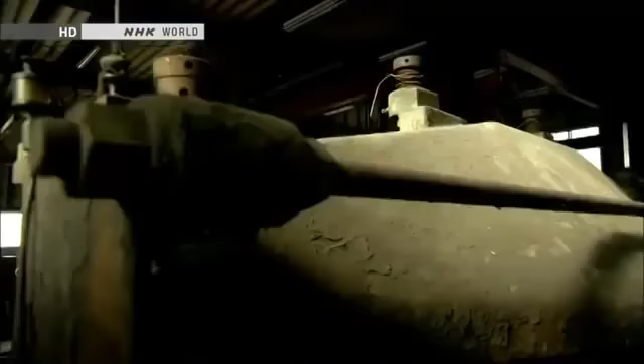The future is just around the corner. In a workshop near Mount Fuji, a curious being has appeared. It's 3.8 meters tall and weighs 4 tons. It is a giant humanoid robot named Kuratas.

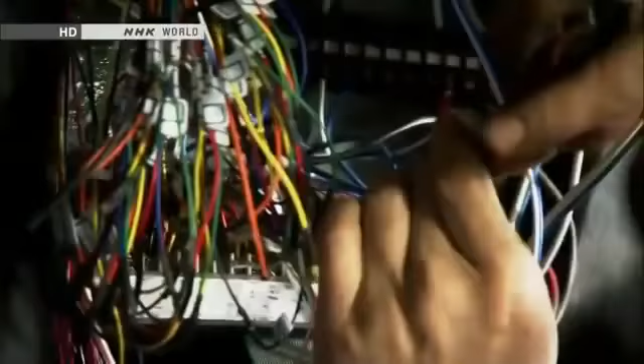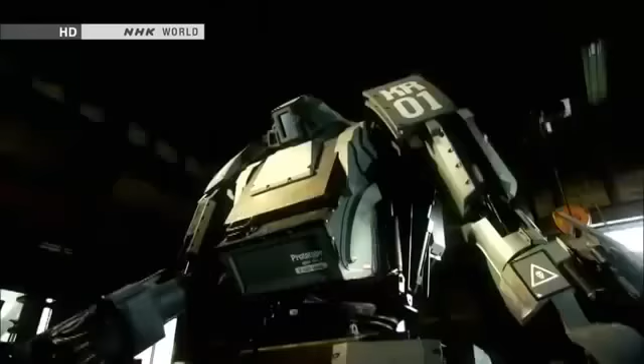Kuratas is a contemporary artist's creation. He holed up here for 2 years, building the robot with input from an expert. He calls Kuratas a work of art, but it's a sophisticated piece of machinery. A person seated inside can control the robot, move its limbs, and grab things. The artist says he was inspired by robots in science fiction tales and animation. That vision sustained him as he worked in solitude.

Things that were once unthinkable are becoming real. How will robots evolve? Well, military applications could be one option. They'll probably become more and more like humans. They could surpass us in strength and ability.

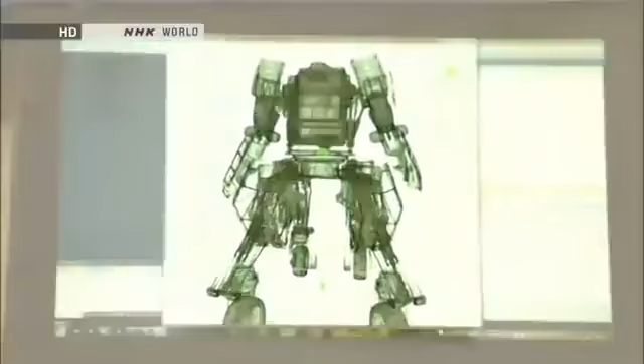People long dreamed of creating these extreme machines. Now, humanoid robots are here. They think like we do, move like we do, and even sacrifice themselves for us.

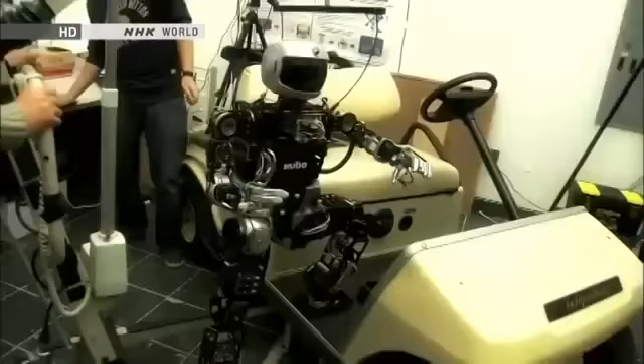We want our robot to change society, because robots must be useful. Electronics and computing, progress in vision systems, there's many pieces of it. We will see much more capability continue to grow.

Since the Industrial Revolution, people have entrusted some jobs to machines. But there may come a day when humanoid robots do much more complex jobs. Then, what will people do? You'll see more and more robots doing things in society, whether it's manufacturing or service applications or home healthcare applications. The key will be to skillfully divide labor between humans and humanoid robots.

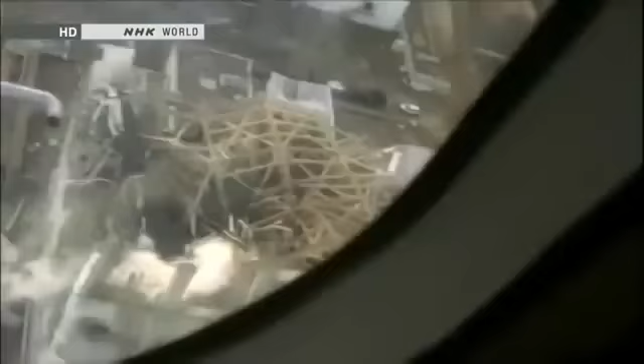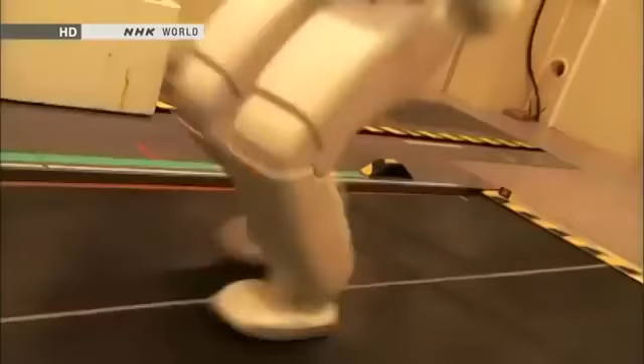The disaster that hit Japan in March 2011 accelerated efforts to develop robots with human traits. The Fukushima nuclear accident left people powerless. Robots can take over when things become dangerous. They can plow through rubble, climb ladders, even make repairs.

People are turning to humanoid robots to handle all of these tasks. We're eager to launch it soon to end the crisis. By joining forces, we can make a truly useful contribution. Only a humanoid could do it. Or the day will come when robots will really assist mankind.

The nuclear disaster in Japan sparked explosive advances in humanoids at the front line of robotics development. This program explores the future that's fast approaching.

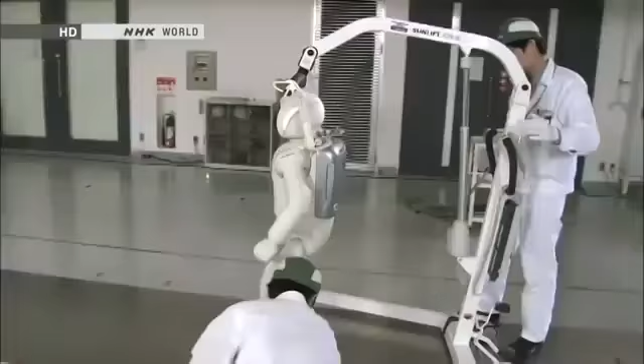Japan is a worldwide leader in the development of humanoid robots. Asimo is the country's crowning achievement. Engineers continue to make improvements.

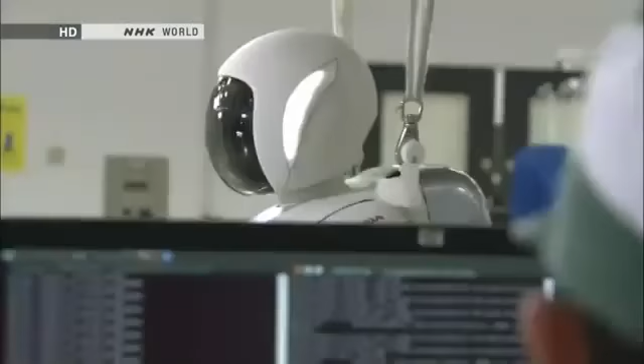Asimo's most innovative feature is its advanced intelligence. The robot can think and act on its own without human intervention. That's made possible by sensors that replicate our 5 senses.

Asimo's head contains 8 microphones. It uses them to listen and engage in conversation.

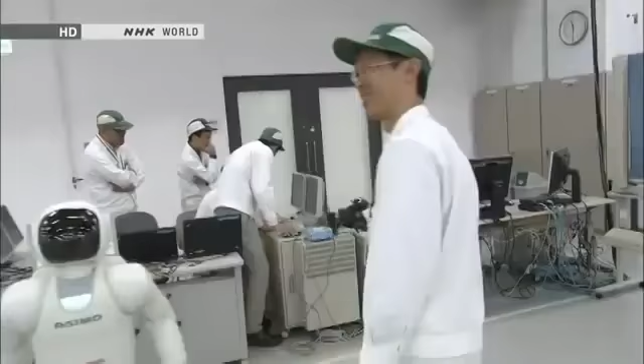2 cameras work as eyes. They can detect humans and use stored data to identify them.

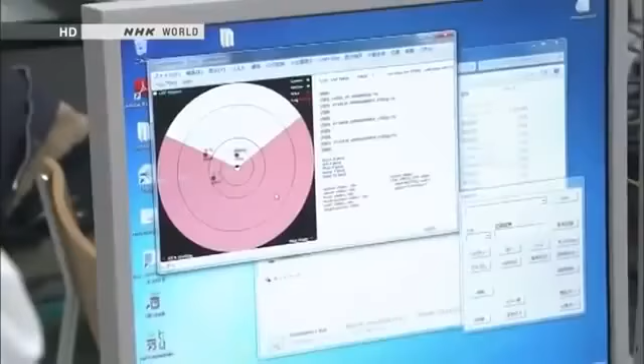Asimo's artificial intelligence analyzes a vast array of information. That's how it understands people's requests and takes appropriate actions.

Asimo also has a sophisticated sense of touch. Its fingers can make subtle movements, like a person's. Sensors are embedded in the fingertips, too. They can gauge the hardness of an object, like human fingers do.

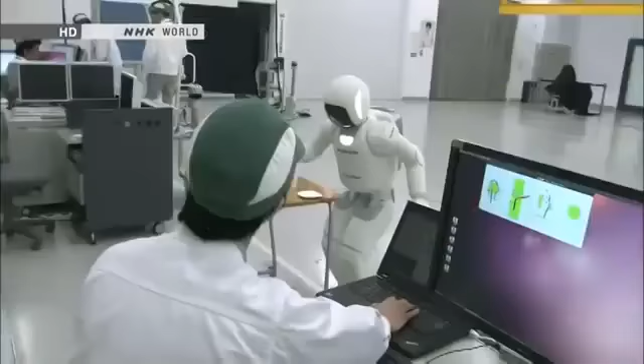Most robots use a fixed amount of strength to grab things. But Asimo exerts more power to open a tightly sealed water bottle and less when holding a paper cup. Its artificial intelligence uses information from the fingertip sensors to adjust the grip.

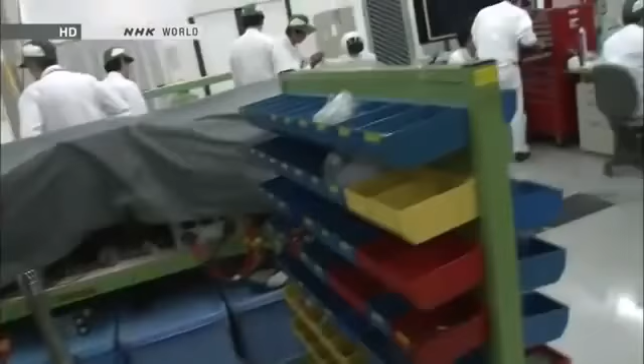The developer's ultimate goal is for Asimo to be a valuable partner that coexists with humans. The engineers who created Asimo all grew up watching animated shows about robots, such as Astro Boy, Doraemon, and Gundam. They dreamed of someday making their own.

Satoshi Shigemi is the development team's leader. He has been designing robots for the past 16 years.

From the beginning, we wanted to design a robot that could help people. To realize that dream, we're constantly asking ourselves, what kind of robot would be able to change society, make people happy, and make life easier for people around the world? Our idea is to create a robot that will change how people live. We're working through the technological issues, one by one, in order to reach that goal.

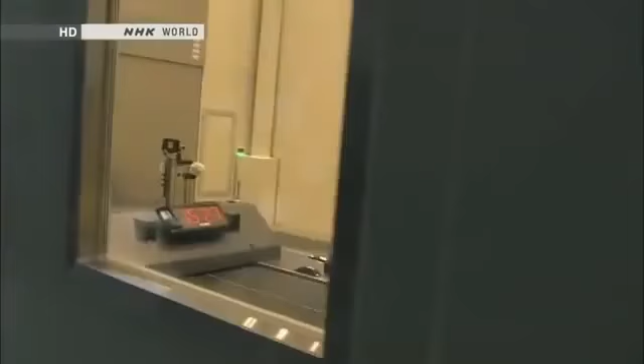Asimo's advanced physical capabilities are revolutionary. The robot can walk and run. It can reach speeds of up to 9 kilometers an hour.

For robots, walking is much easier than running. When running, both feet momentarily leave the ground. Balancing in mid-air is no easy task.

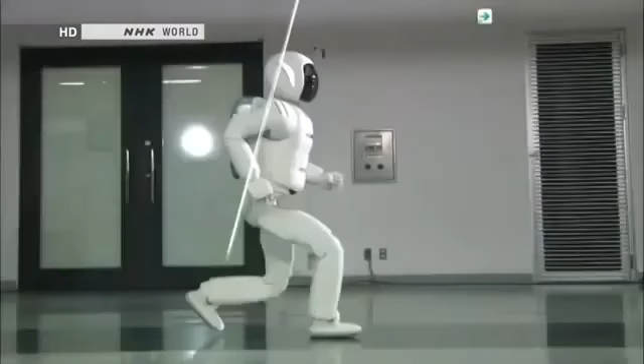Maintaining posture while jumping or floating in the air was a major technological breakthrough. Asimo leans its upper body slightly forward to maintain overall balance, going forward straight in the air. Sensors in Asimo's waist measure the robot's angle, and it leans slightly to compensate, forward or back, side to side. That's how it stays perfectly balanced in the air.

Asimo has been evolving ever since development began in 1986, much like a growing child. But something happened that made researchers realize Asimo's real-world limitations.

It was the accident at Tokyo Electric Power Company's Fukushima Daiichi nuclear plant. The damaged reactors released radioactive substances, making it difficult for humans to deal with the crisis. People needed something that could confront the dangers and bring the plant under control.

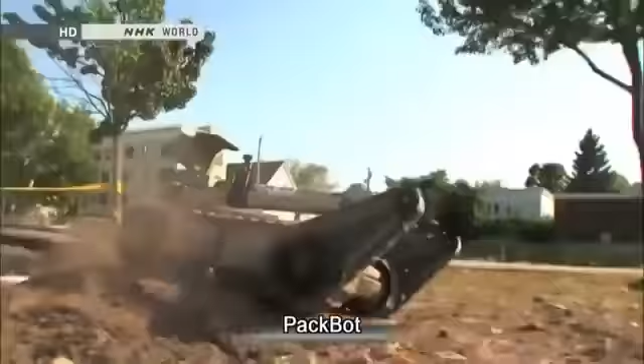Robots. Japanese officials sent a request for robots developed by the U.S. military. The robots were sent to Fukushima in April 2011. They recorded images inside the damaged reactors.

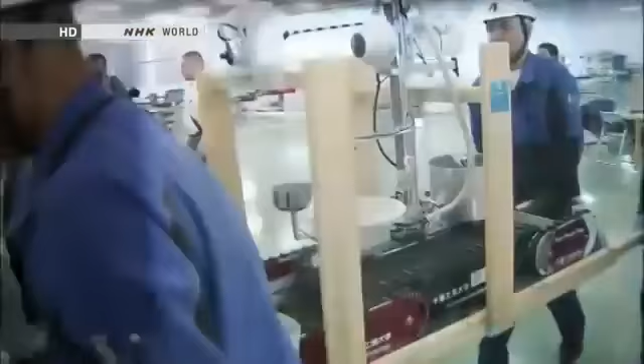Since then, a variety of Japanese robots have been enlisted as well. Robots have proven to be useful, but 2 years after the accident, they're only used for inspections. They're not able to do all the work of humans.

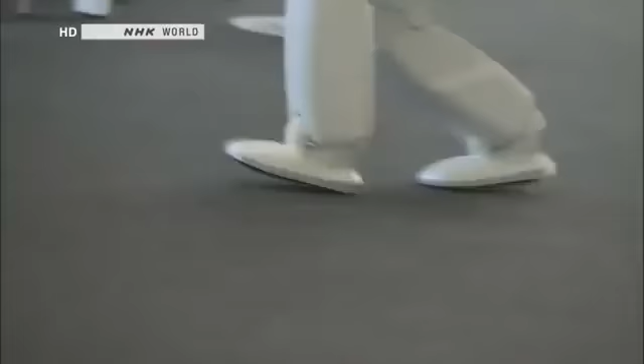What about Asimo? Right after the disaster, people flooded Honda with phone calls and emails asking the company to send Asimo to the Fukushima plant. But Asimo wasn't up to the task. It could move nimbly over an office floor and other flat surfaces, but large vertical gaps and obstacles were a different story.

We heard from many customers. We ourselves regretted that Asimo couldn't be of help. It was obvious that Asimo we had built wasn't ready for real-life action. We realized right away that we needed to make something different, something new that could offer immediate assistance.

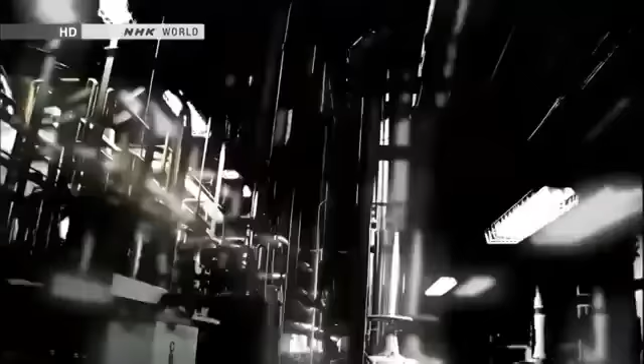Honda wasted no time. Company officials offered to create a robot free of charge to assist TEPCO in the recovery. TEPCO accepted. Officials asked for a robot that could open or close valves inside the nuclear plant. We wanted to flush out radioactive materials that remained inside the pipes and bring down radiation levels in the facility. That was our first goal. Unless we opened or closed the valves, the area would remain highly radioactive, and that would prevent workers from entering the facility and impact the entire decommissioning schedule.

How many valves are there? Each unit has from several thousand to tens of thousands of them.

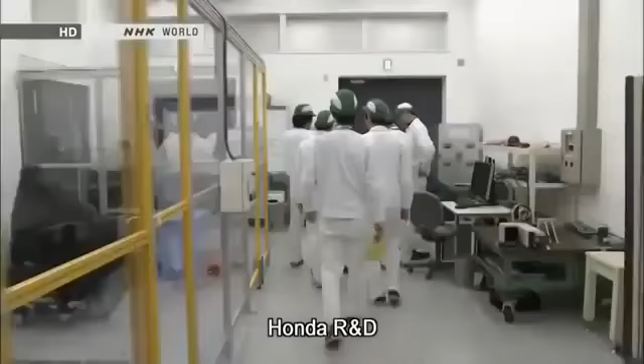In July 2011, 4 months after the accident, Honda began designing a robot for use at the nuclear plant. Members of the Asimo team were put in charge of the project. A humanoid robot would take too long to build, so engineers focused on making a robot specifically for operating valves.

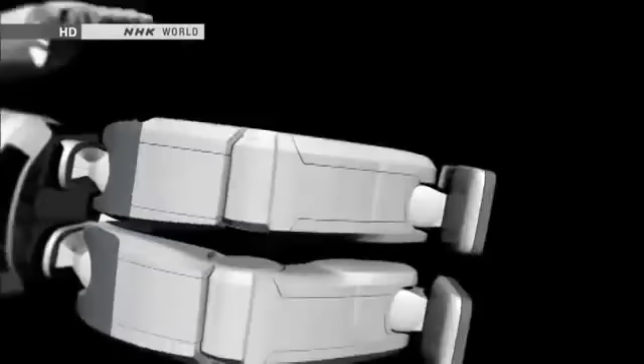Asimo was crucial to their efforts. Its ankles employ advanced balancing technology. Developers reasoned that using it would allow the new robot to work inside rubble-filled reactor buildings.

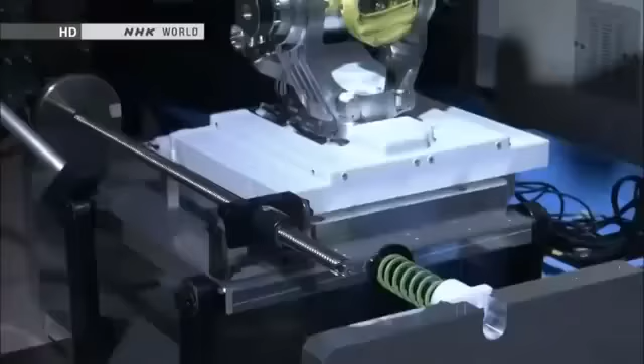The team worked exceptionally fast, completing a prototype in just 4 months. They turned Asimo's leg into an arm for operating the valves. Even when the base moves, the arm remains steady. So far, so good.

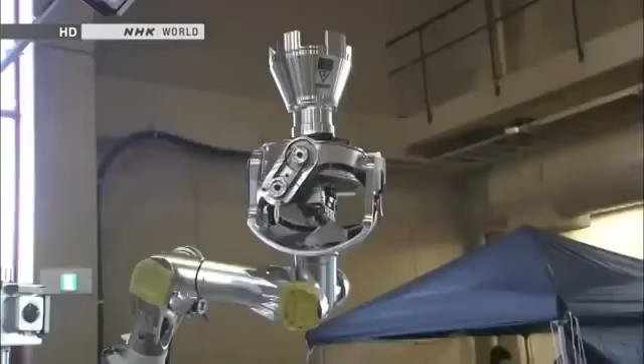Officials from TEPCO evaluated the prototype at the National Institute of Advanced Industrial Science and Technology. The government-backed group for cutting-edge research contributed to the development effort. A TEPCO official couldn't take his eyes off the robot's movements.

We may be quite demanding. That's okay. We might be quite direct. The test is designed to replicate conditions inside the nuclear plant.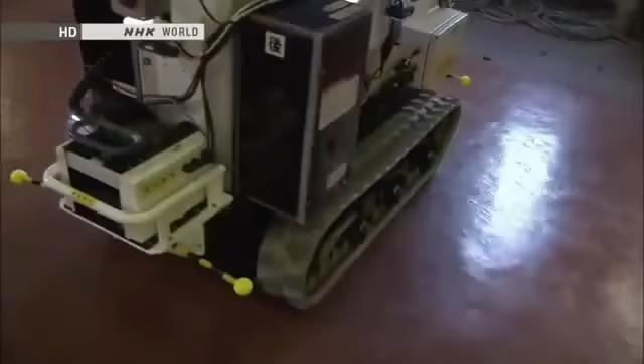The robotic arm is remote controlled. Testers send the arm toward one of the valves. There are a number of unknowns, including the condition of the valves. They may have rusted since the accident. A valve might break if the robot applies too much force, or it might not budge at all.

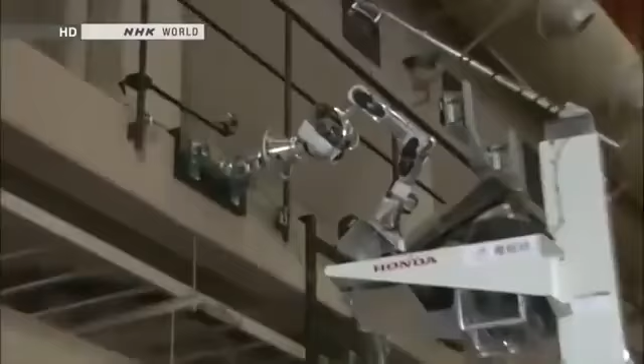The robot uses just the right amount of force and turns the valve on the first try. It's passed the test. This robot can do more than inspections. It could help in the recovery effort.

From what we've seen, the robot seems near perfect. We want to use it as soon as the need arises. It's important that we quickly do what we can to make that possible.

The Fukushima accident also encouraged U.S. developers to design emergency response robots. Department of Defense officials have spearheaded the effort. Before, they had shown little interest in humanoid robots. Now, they view them as vital for disaster response. The architect of the new strategy is Gill Pratt of DARPA. He oversees funding for leading-edge research at the Department of Defense.

There are many aspects of disaster response in Fukushima that inspire people in robotics to work on new capabilities. If they were able to take action during those first 24 hours, the first reactor maybe would not have blown up, in an environment too dangerous for a person to work in.

What's important to us is that the robot is compatible with human environments, compatible with human tools, and also compatible with human operators without special training. As a result, the easiest form that comes to mind is the human form.

DARPA is backing the development of a humanoid robot for catastrophes, such as nuclear power plant accidents. This company is leading the development work, having already built several military robots. Okay, I'll show you the current status of the robot.

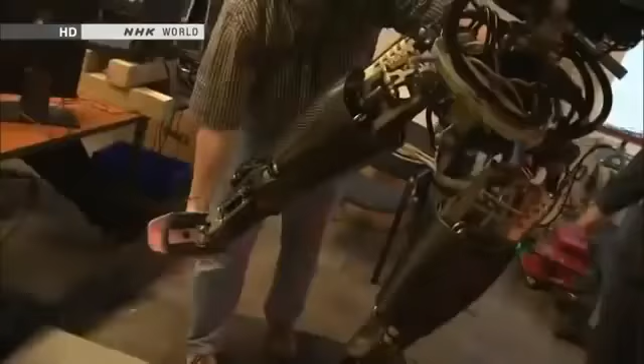This is the first American-made humanoid robot for disaster response. It's called Atlas. Before, U.S. designers had focused on robots with specialized functions. Why the sudden interest in humanoid robots?

Traveling over debris, prying open valves, using tools for repairs - performing multiple tasks like these is impossible for specialized robots. Crises also require robots that can navigate doors and stairs. Humanoid robots are ideally suited for such situations.

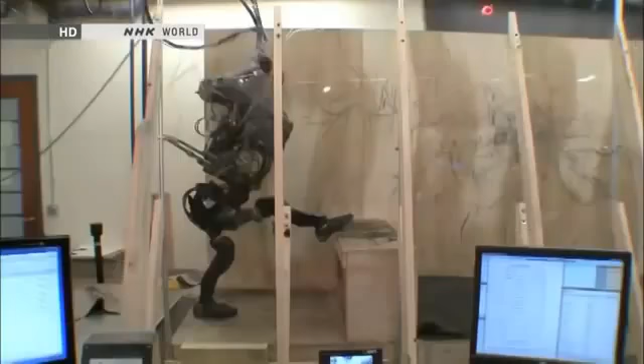Tests of this prototype were going smoothly. It can easily climb stairs and jump from a height of nearly 1 meter, and can negotiate obstacles using its arms and legs. It can already handle more demanding environments than Asimo can.

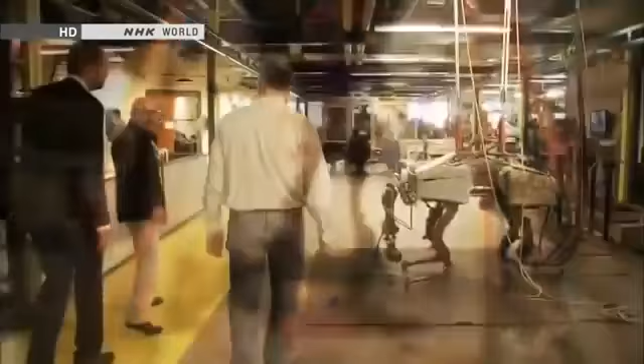Atlas is loaded with technologies originally designed for military robots. A quadruped robot called Cheetah can race through a battlefield at 50 kilometers an hour. LS-3 is for transport - it can carry heavy supplies for soldiers.

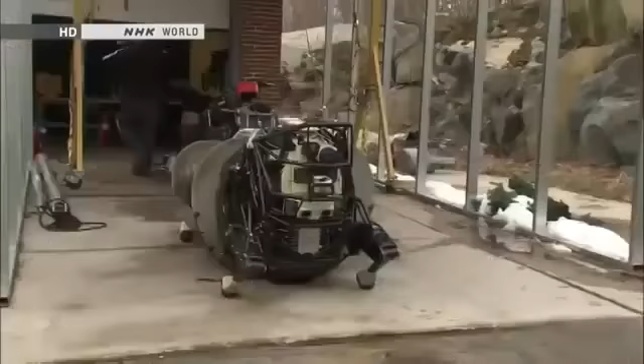The ferocious-looking robot gets its strength from a powerful hydraulic drive system. A hydraulic device can be small, yet quite strong. The black cables convey hydraulic power to the legs, generating the brute force required for harsh battlefield conditions.

A web of hydraulic cables covers Atlas's body, forming a muscular suit of armor for clearing debris.

Another important technology comes from military robot engineering. This machine's joints have a wide range of motion, allowing for flexibility that humans can't achieve. Atlas's joints are capable of moving in 28 different ways, so it can crawl through narrow spaces and withstand sudden shocks.

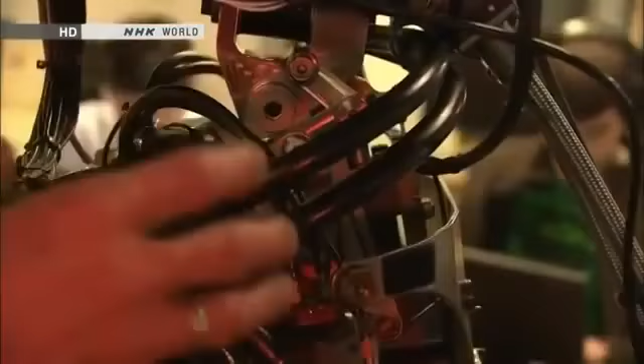But then we have the knee - this has 3 in the hip, just like us, moving this way, and then this way. I am very impressed with the number of degrees of freedom - it will be able to do these human-compatible tasks without a lot of the limitations that other robots have.

Engineers will combine Atlas's rugged body with sophisticated artificial intelligence that's almost near completion. They aim to complete the robot by December of next year.

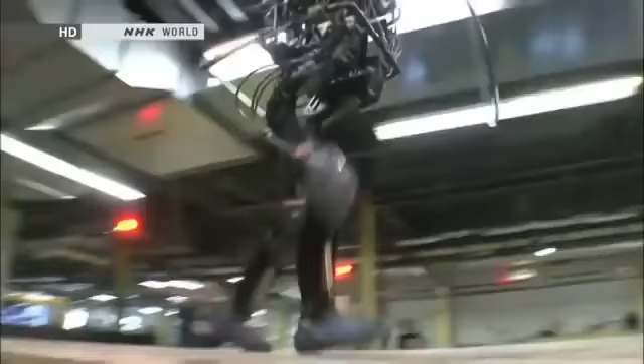One reason you see humanoid robots is because there are some people working who are really interested in robots as an entertainment thing or as a performance thing. I think that's different - we're much more interested in basic capabilities for emergency response and rescue. So I don't think Asimo has been designed to do those things yet.

U.S. engineers stepped up their efforts to develop humanoid robots after the nuclear accident in Japan. Japanese researchers are embracing the same mission.

In November 2012, robot engineers from around the world gathered in Osaka for an international conference on humanoids. Gill Pratt from DARPA was one of the participants.

He came to invite engineers to join a project sponsored by the U.S. Defense Department. On March 11th, after 24 hours, if only a robot had been there to go and open that valve, the entire disaster could have been averted. But we didn't have one, and furthermore, we didn't have anyone that could do the job. So shortly afterwards, we actually started planning the DARPA Robotics Challenge.

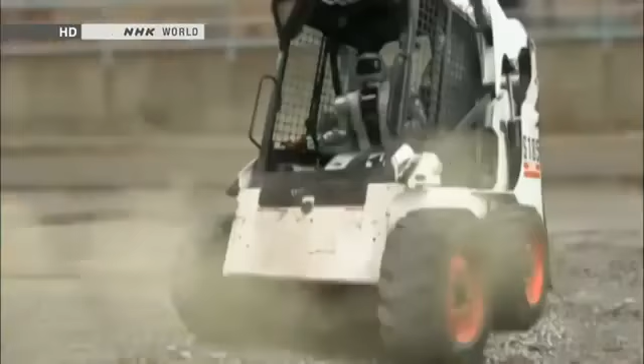The challenge consists of 8 tasks: driving a vehicle to approach a disaster site, walking over rubble, removing obstacles, opening doors, using tools to break down walls, climbing ladders, turning valves, and making repairs.

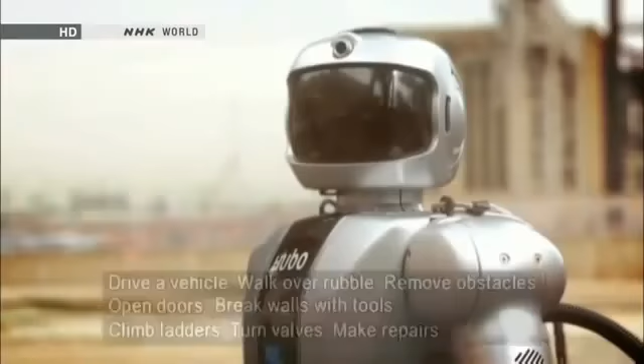A single robot must complete all 8 tasks. The development period is 2 years. DARPA will provide contestants with funding of up to $4 million.

DARPA has received over 100 proposals from research groups worldwide, including renowned organizations like NASA and MIT. Japan is at the forefront of humanoid robotics engineering, yet its researchers hesitated to throw their hats into the ring.

So actually, to me, it's difficult not to see that some of the results of the DRC are going to be used to advance, as you say, advanced military technology. The DRC is about developing robots that I believe wholeheartedly are completely impractical for offensive military purposes.

Will the technology that we come up with find its way into military systems? Probably yes. But I guarantee you that if you work on a robot for healthcare, there's a chance that that technology will also find its way into military systems.

The members of one Japanese research institution wanted to take part in the competition.

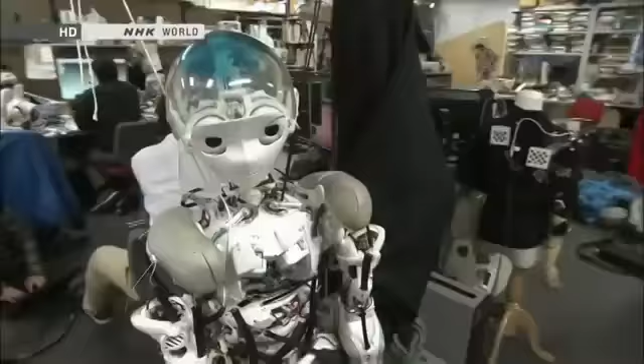They worked at the University of Tokyo's robotics lab. Researchers there, along with those at Honda, are global leaders in robotics engineering. But they faced a major obstacle to competing: the university bans military-funded research.

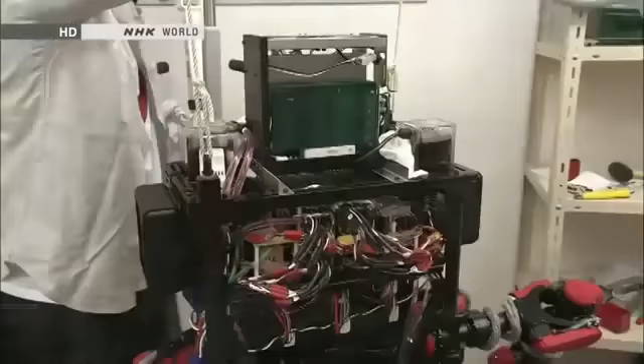Three researchers made a decision. They told the university they were leaving. Then they decided to set up a venture company and enter the DARPA Robotics Challenge. They couldn't shake the feeling that they should leave their quiet university lab and help resolve the nuclear crisis.

Six months after launching their venture, the team had just completed a prototype with help from university graduates. Its long arms can exert 10 times more force than those of conventional humanoid robots.

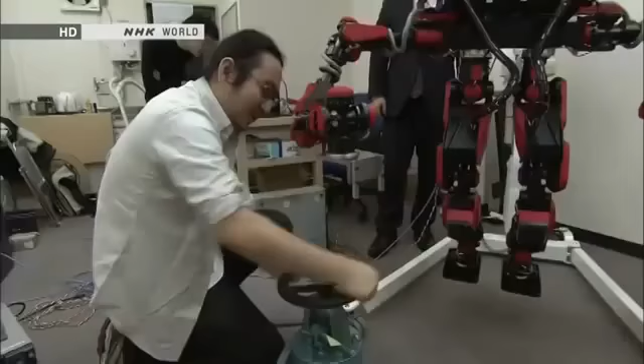It's too tight to turn with one hand. It can easily turn a valve that's too tight for a person to turn. The strong force comes from a large electric current that pushes the motors to their maximum limits.

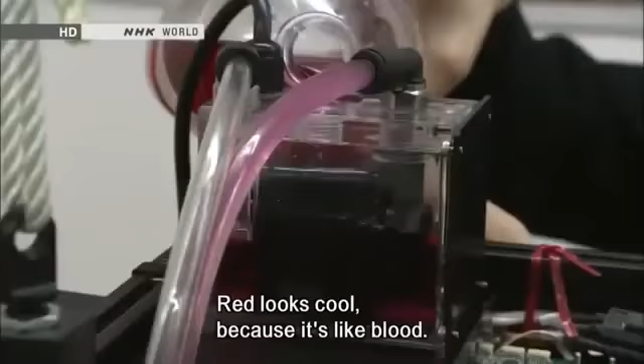A reddish fluid circulates through the robot's body. The fluid serves as a coolant that keeps the motors from overheating. The cooling system should enable the robot to perform hours of grueling work at disaster sites.

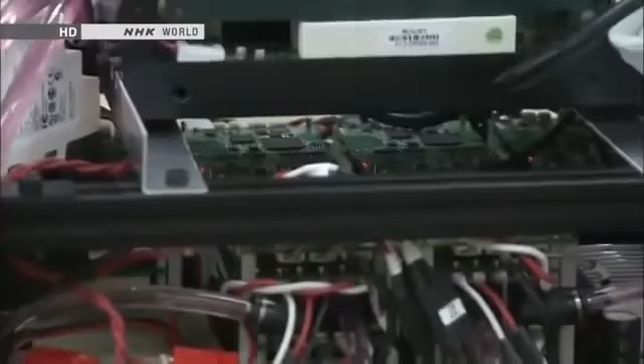The time has now come for the developers to apply their years of research to the real world. A nuclear crisis has happened here in Japan. Radiation is escaping. Researchers in every field must wonder at least once if the technology they've been working on could help resolve the crisis. By joining forces, we can make a truly useful contribution. It's with this in mind that we decided to enter the competition.

One country is quickly catching up with Japan in humanoid robotics: South Korea. KAIST is a government-funded lab for the advancement of science and technology. Researchers there were among the first to express interest in DARPA's Robotics Challenge.

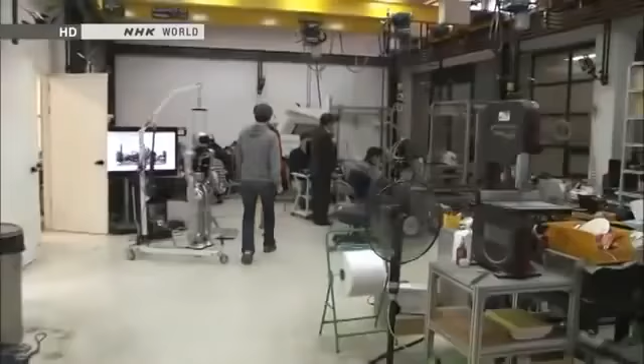This humanoid robot is called Hubo. It's modeled on Asimo, which Honda spent 14 years developing. Hubo was built in just 5 years. Hubo deftly manipulates its hands, and it's also good at dancing. Its moves look just like Asimo's.

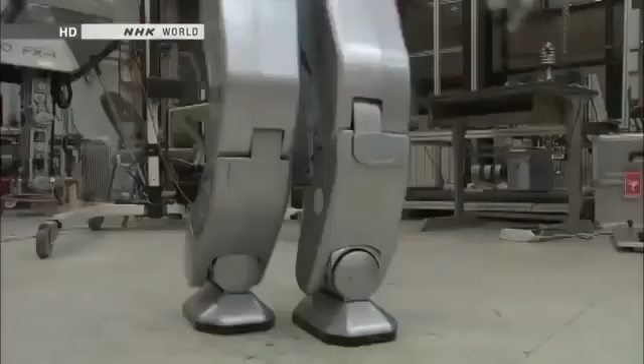Hubo has been undergoing a major upgrade ahead of the competition. It can now bend backward at the waist while walking to handle all kinds of environments. It can quickly pick up tools. The tests were going well.

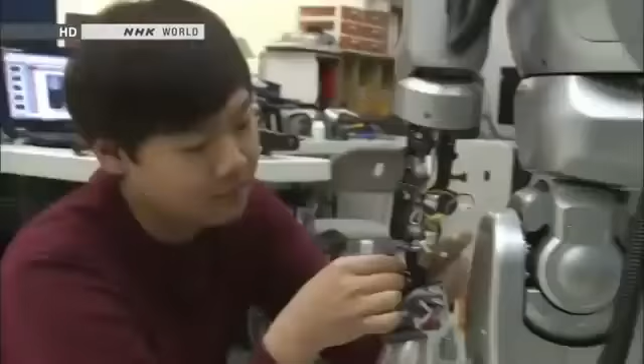People have always compared Hubo to Asimo. Engineers now had a strategy to get ahead of the Japanese developers. They decided to publish certain details about Hubo's design and pursue joint development with researchers at other institutions. One could say that this space inside Hubo's chest captures the heart of their thinking.

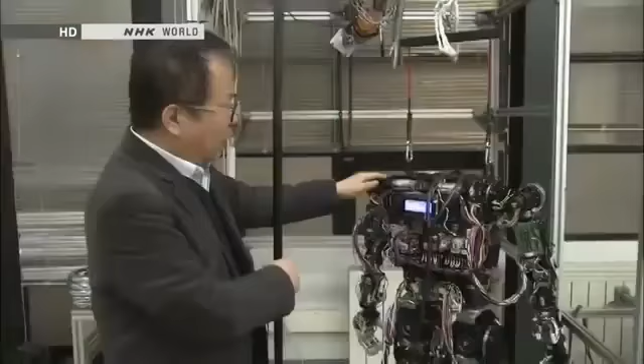It's empty now, but this is where artificial intelligence will be installed. It's removable. Hubo does not yet possess artificial intelligence. Its motions are as sophisticated as Asimo's, but Hubo's movements are all pre-programmed.

U.S. universities that lead research into artificial intelligence will develop a brain for Hubo. The stage has been set for a joint U.S.-South Korean team to compete in the DARPA Robotics Challenge.

Sharing is the key to making technological advancements. That's true in South Korea and in other places too. Research shouldn't be confined to one place. People developing humanoid robots elsewhere are too close-minded.

Researchers at Honda were also invited to enter DARPA's competition, but they declined. Their energies were focused on designing a robot to tackle Japan's nuclear crisis.

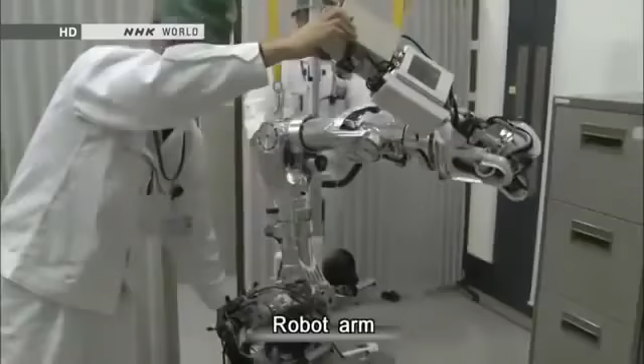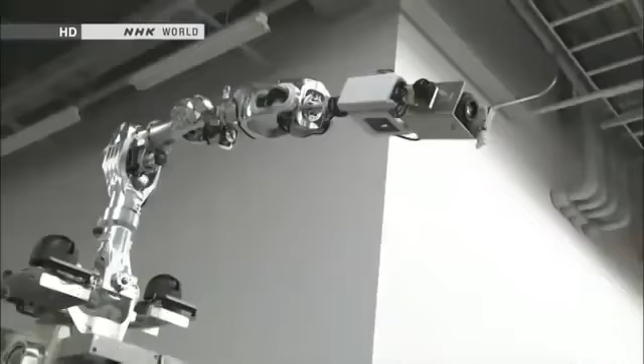Nearly a year has passed since Honda's robotic arm passed evaluation tests, but the device has yet to be deployed to the nuclear disaster site. That's because officials at TEPCO requested a change in specifications. Engineers have replaced the valve-turning hand at the end of the arm with a camera.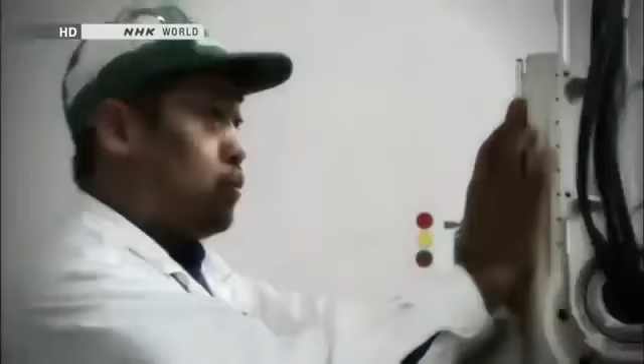TEPCO had changed its plan. Officials decided to put priority on assessing conditions inside the plant's facilities. They said it was too early to have robots work on valves. There wasn't even a recovery plan in place when we were working out the valve manipulation tasks.

The robotic arm will soon be sent to the accident site. It will provide the first images filmed from high up. The robotic arm was not the end of Honda's efforts. Its engineers had another secret mission.

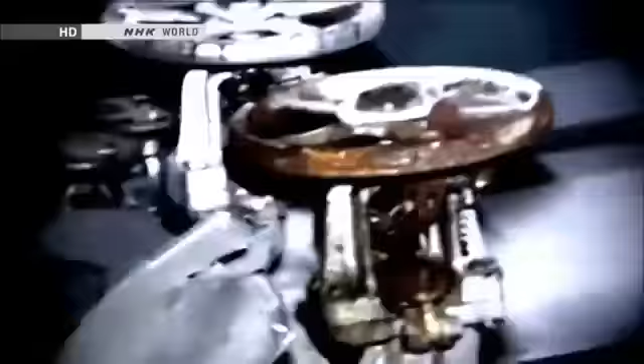They would develop a new humanoid robot, an updated version of Asimo for use in disasters. The site where the Fukushima disaster took place is dark and off-limits to humans. Only a humanoid robot with both intelligence and motor skills could climb over the debris, get to the accident site, and perform the work of people. In other words, a robot like Asimo.

Asimo's engineers were united by this idea: let's use our skills to make a humanoid robot that can tackle disasters. The robot they envisioned would not only walk, but also use its arms to crawl. It would use every means possible to reach its destination. A dramatic update would be necessary.

A disaster reduction robot would be useless if it couldn't get to the site. It's important to get to the scene no matter what. Disasters create all kinds of debris that crumbles easily or breaks when stepped on. It's because it's dangerous that robots replace humans. That's what makes them valuable. A robot that couldn't get to the scene would be totally useless.

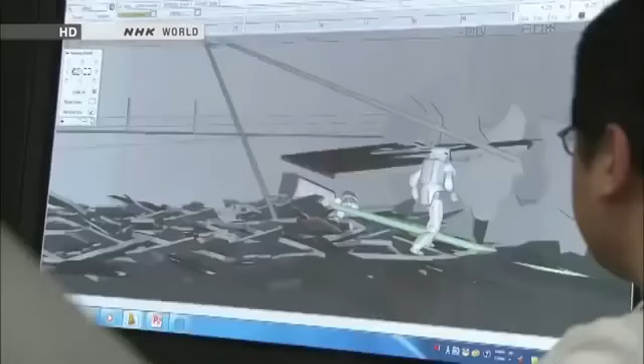Honda's engineers began developing robots in 1986 with the goal of making people happy. 27 years of research is now being put to the test. As we saw in the Fukushima Daiichi crisis, the bottom line is that robots can stand in for humans in places that we can't go to or that are too dangerous. I am committed to delivering what's needed, when needed, in the shortest amount of time.

The accident in Fukushima spurred the development of humanoid robots around the world. The disaster also prompted people to question the roles of humans.

One of the largest trade fairs featuring industrial robots took place in November. Global manufacturers displayed their latest models. Companies are developing more and more two-armed humanoids for industrial use.

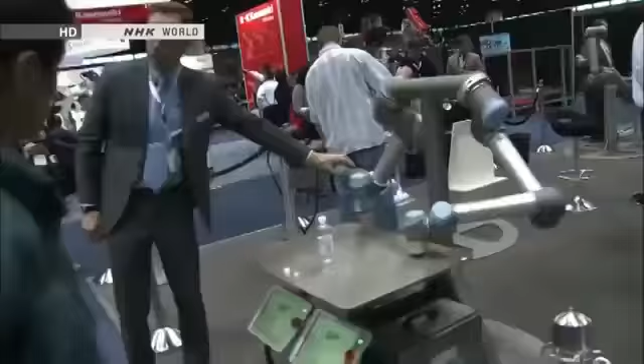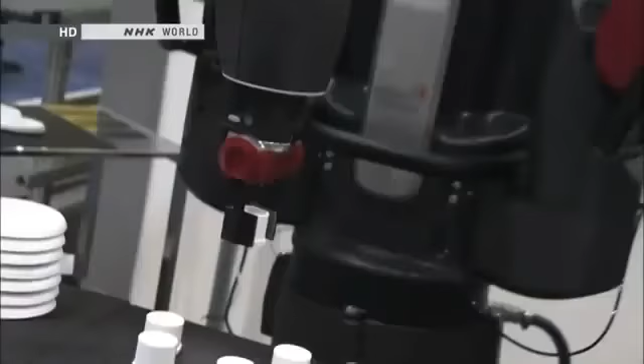One new product at the event caught a lot of people's attention. Baxter was created by the inventor of a best-selling cleaning robot. It's equipped with sophisticated artificial intelligence, and is designed to work side by side with people in factories and other settings.

The robot's most unusual feature is its ability to master a task in a matter of 5 minutes. All that's required is step-by-step manual instruction. No complicated programming is needed.

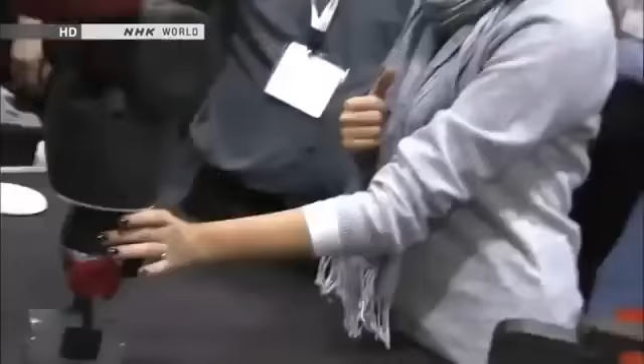Let's pick up this part. So you bring the arm to the part. Yep, just like that. So we have the part. Close the grasp. Yep. Grab the arm and bring it to the table.

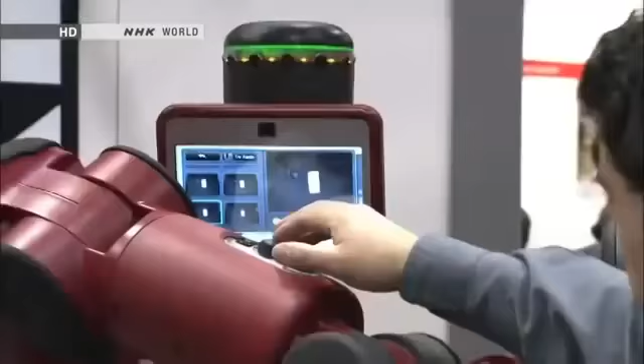The expression of the face on the LCD screen shows whether or not the robot has understood the task.

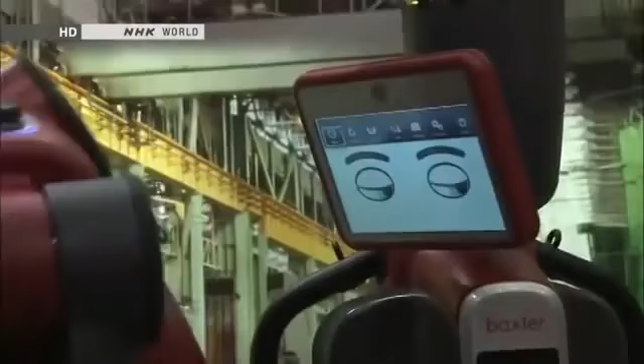Baxter costs $22,000, a bargain for a humanoid robot. The maker says buyers can recoup their investment in several months and slash labor costs.

I'm very impressed with it. I work for a small manufacturing company, and we have some older employees who are looking to retire, and there's some tasks that Baxter could do for us very effectively. Plus, it would be cheaper than employing a person. It's not going to get tired. It's not going to need to stop. It'll keep running while everybody else is taking their lunch.

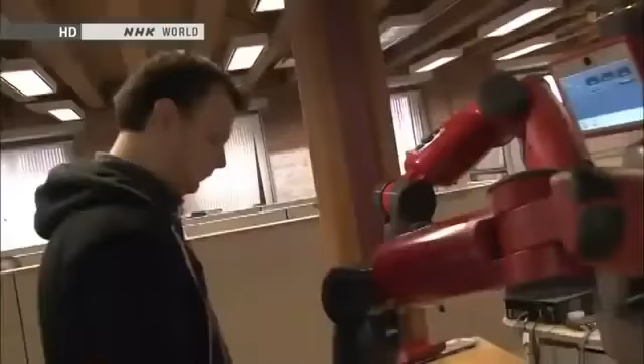The Boston-based manufacturer has a flood of back orders. Officials say someday Baxter will work at places like coffee shops, taking orders and grilling burgers. Eventually, they expect to have 500,000 U.S. customers.

Today we're focused on manufacturing, and there's a very big opportunity in manufacturing. But there's lots of other places that a robot like Baxter could go. We had the Industrial Revolution at the turn of the last century. We've just gone through the computer revolution, effectively at the turn of the most recent end of the century. We are now into the robot revolution.

Will people and robots someday compete for jobs?

At 8:30 one morning, a group of new employees takes part in daily morning exercises. They are 13 humanoid workers called Nextage. This company began using the robots in earnest last year.

They have 2 eyes and are just like humans. They're cute!

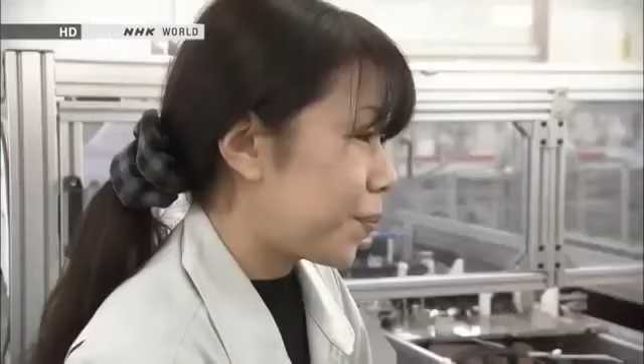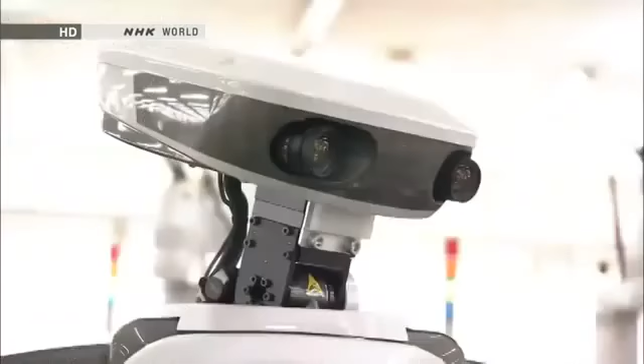This factory manufactures money sorting machines for cash registers. The humanoids work on a production line that was previously manned entirely by humans. The robot visually confirms the parts set in place by a human worker, then it begins its task.